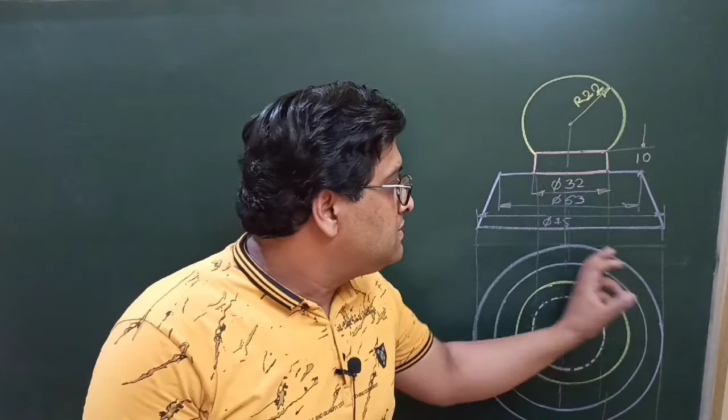Here is a paperweight which is having a spherical knob, a cylindrical part and a frustum of a cone. So in the problem only the front view is provided to you. This top view you need to draw. I have drawn here the top view for your convenience.

So what you have to do, initially you can see, when we see from the top, this 44 mm diameter spherical part is visible like this from the top, right? And this cylindrical part is not visible, so it has been drawn in hidden lines.

The top face of the frustum of the cone is visible, that is with a diameter of 32 mm. 32 mm is the diameter of this cylinder, and this is 63. So this is having the diameter of 63 and the bottommost diameter is given as 75 mm. So we have drawn all the diameters in the top face.

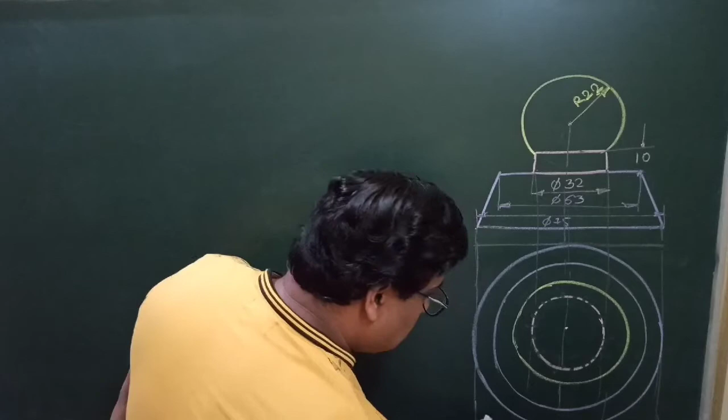Now to start with, initially enclose the lowermost bottom of this front view so as to enclose in a four-sided figure, that is square in this case. So we have enclosed the lowermost bottom 75 mm diameter in a square, and let us start with the drawing.

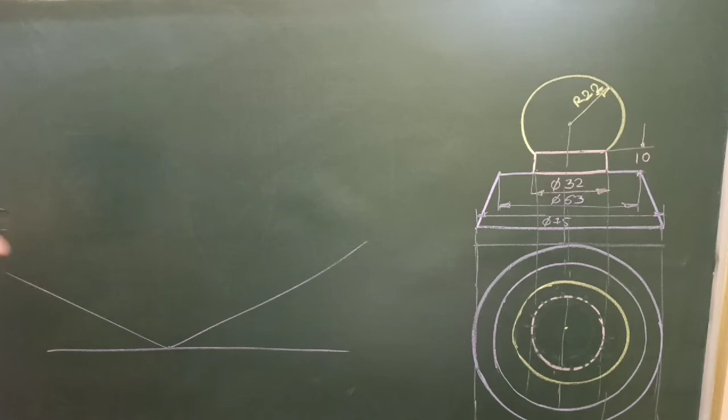So initially draw two lines at an angle of 30 degree here. This point may be this one, so say this is A, B, C and D. So you can cut from A to B, taking these dimensions from there and multiplying it by the scale.

So you have to take this distance multiplied by 0.82 or 0.816. So these two will be the markings, say here, somewhere around here. So this is B, this is D. Now draw the parallel lines so as to get the point C here. So this is the lowermost.

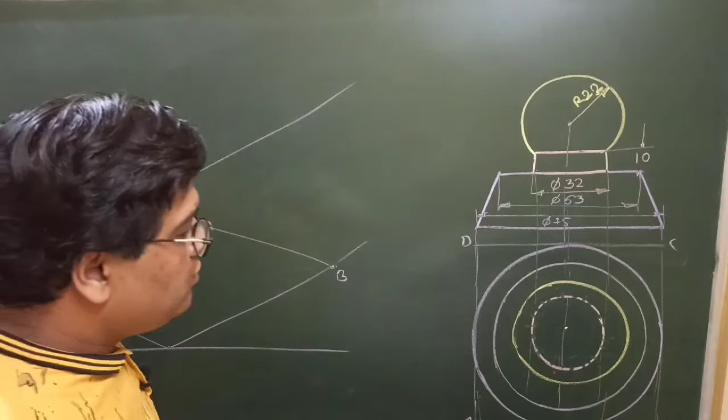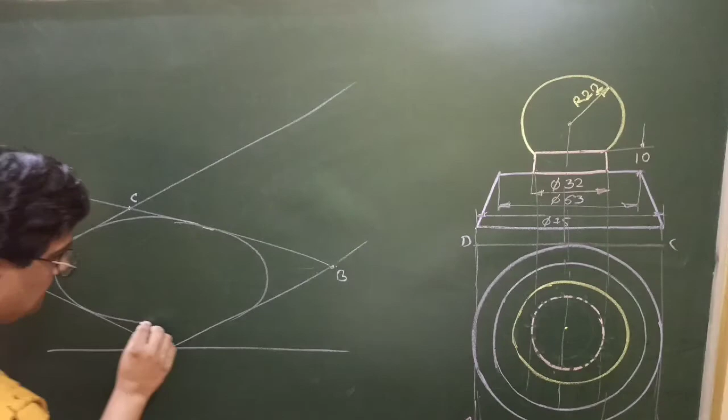Now using four centers method or method of points, you can easily draw the ellipse here like this for the lowermost bottom, that is this one. Now to draw the top face of this conical part, again you have to enclose this circle into a square, and you can mark these corners.

These corners you can easily mark using MN method, as we have already discussed in the previous videos. So this MN method is actually method of points. So you can mark, but before that you have to project the height. So give a height of whatever has been given here. It is, say for example, 25 mm. So this height you have to mark here,

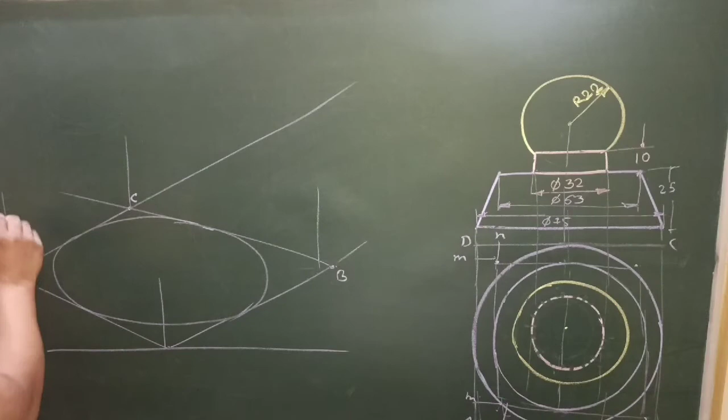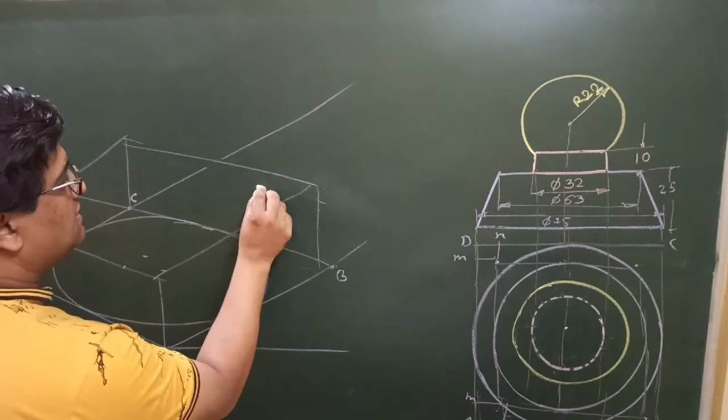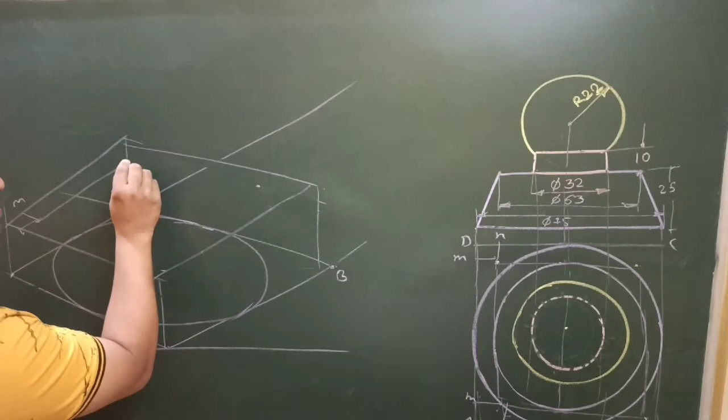so that you are getting another rhombus at the required height. And you can mark using MN method these points. Say these points are here. These are obtained by drawing the parallel lines from M and N. So this is the smaller rhombus for the top face. Now you can easily draw again with the use of either 4 centers method or method of points; this will be the ellipse for the top face of this lower part.

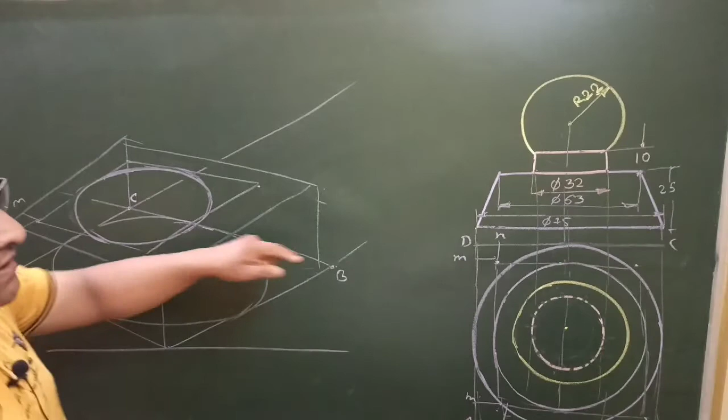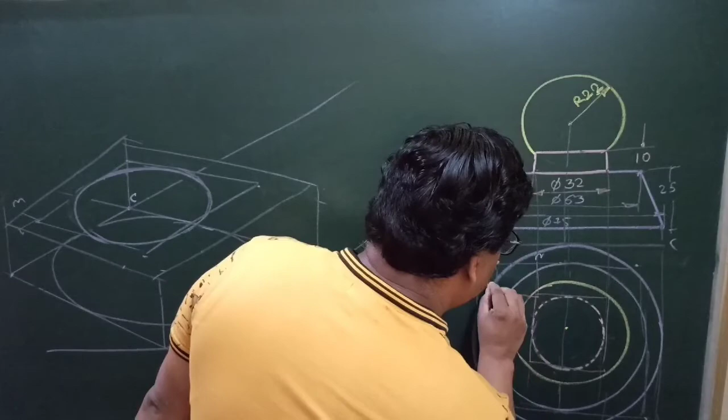Now you have to draw this cylindrical part. For that, again you have to enclose this cylindrical part into a square, and you can easily mark this using MN method with this bigger one. So you can take these points M and N, so that for example you are getting points here, here, here and here.

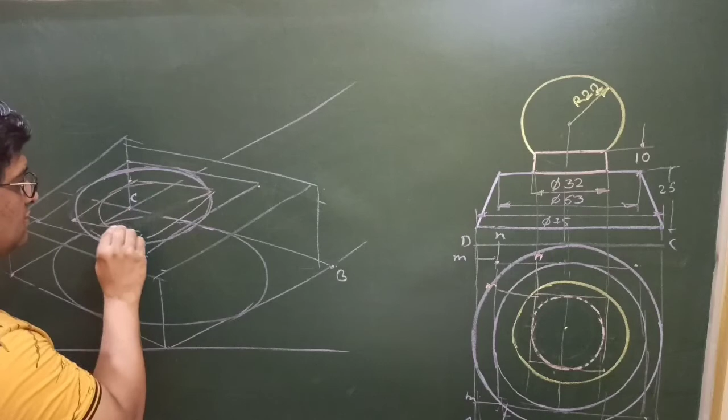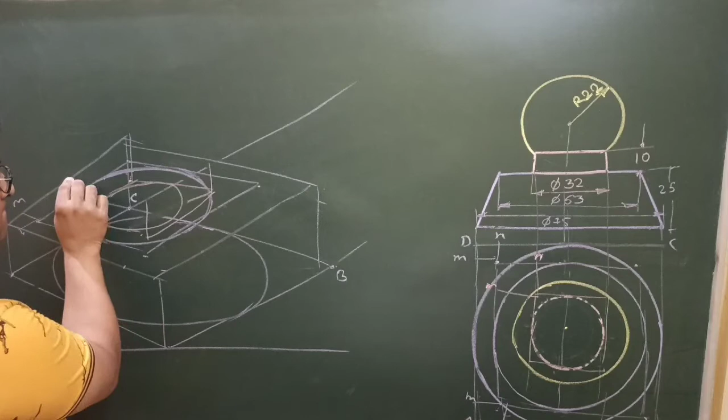So draw another rhombus here and then one ellipse for the cylindrical part. You can project the height of the cylinder here, and another ellipse for the cylindrical part. So two same ellipses will be formed at a height of 10 mm.

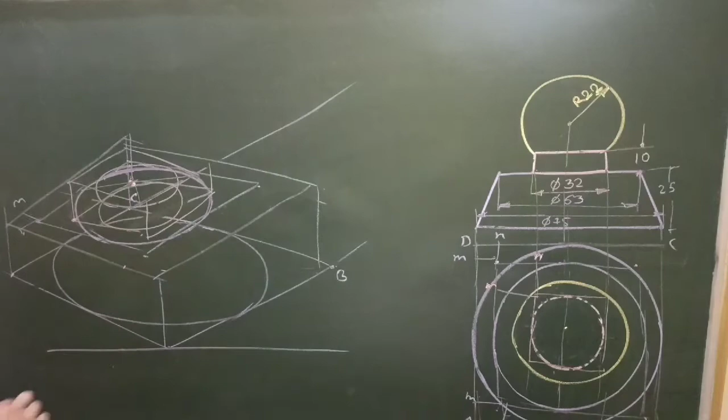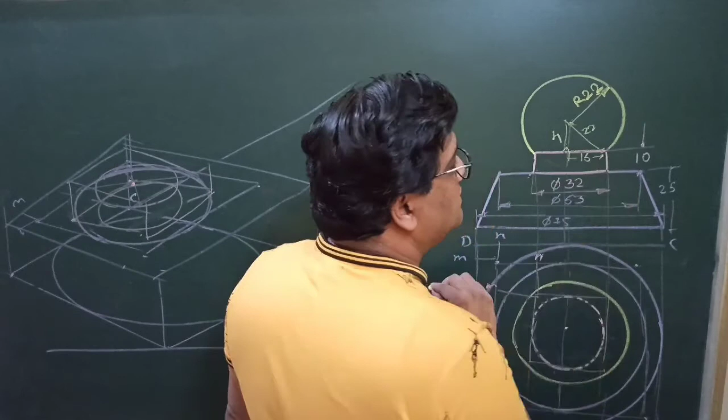Now you have to identify the center. This will be the center, and move up to a height of this one. Now this height is required here. This can be calculated using the Pythagoras theorem, because this is 22 as given here, this is 16 because this complete is 32. So calculate h, which is nearly 15 point something, 15.1 mm. Say this is height of the center.

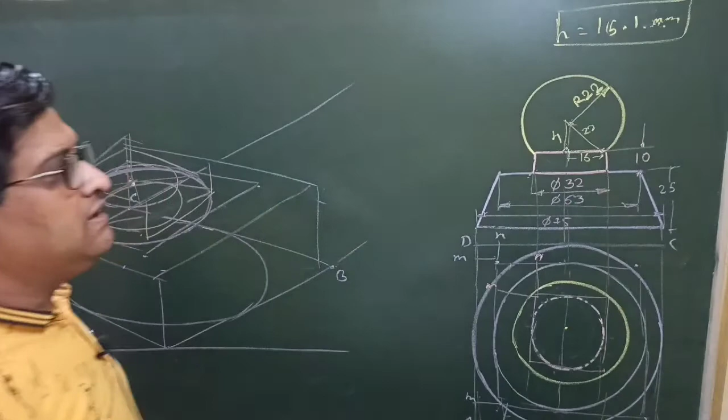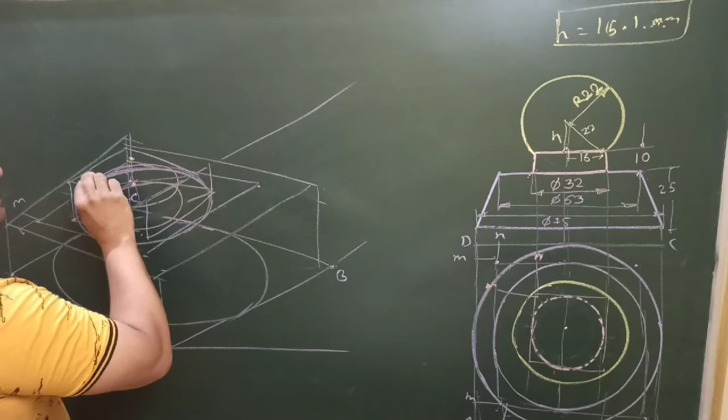So multiply this height by 0.816 and mark the point of center here. Then take the original radius, that is R22, and draw a circle here, which will be joining this cylindrical part at some point. Now you can highlight; so this will be the cylindrical part.

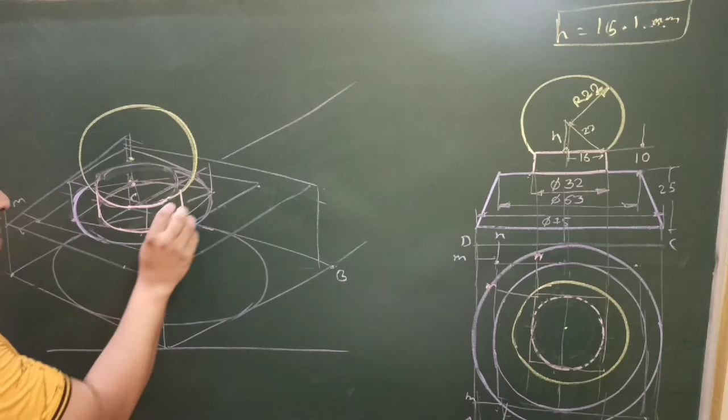You need not show this, only light you can keep it, and this yellow one is the spherical part. Now you can highlight the cylindrical portions, so they are somewhere around here, and this is the lower part which is to be darkened. As far as the lower part is concerned, only the front part is to be darkened, and join them with tangential lines like this.

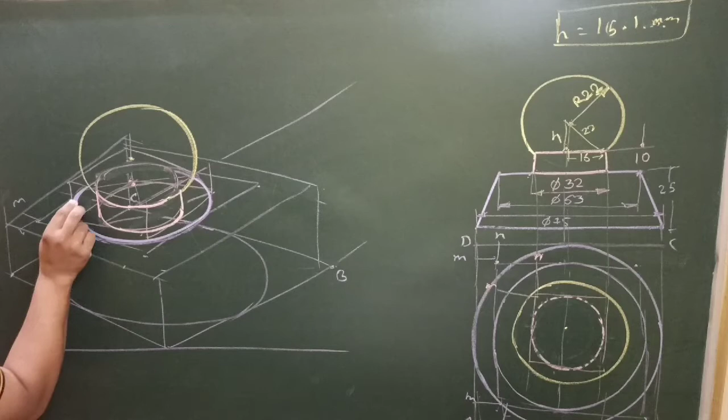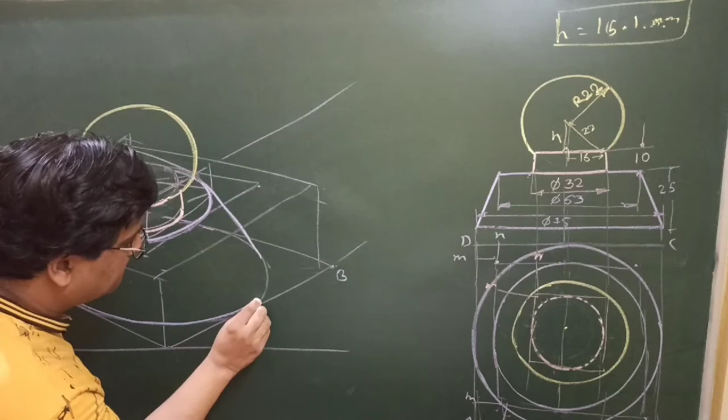So now you can darken them, this line and this line, and then this part. Like this. So this completes the isometric projection of this paperweight.

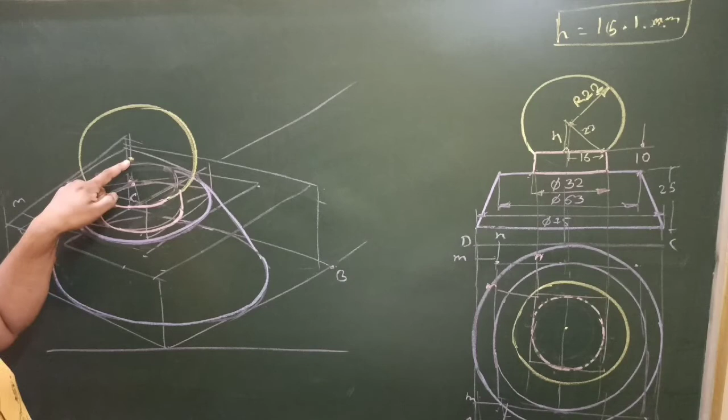Similar type of questions can be attempted using the methodology, but remembering that whenever there are spherical parts, you have to take isometric scale into consideration till the point you are going to draw the circle for the sphere. Means up to the point when you have identified the center in the diagram, you have to take scale,

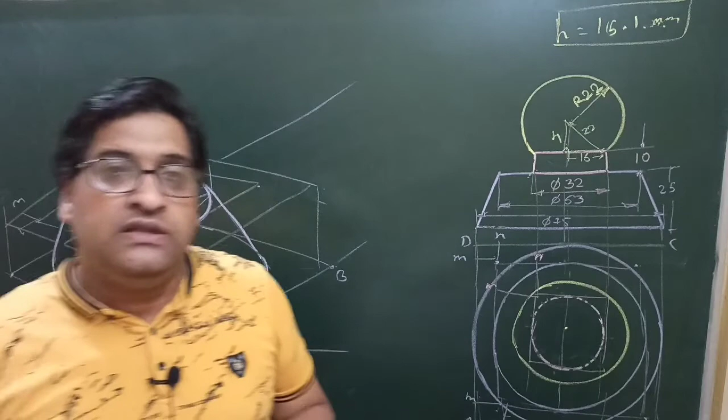and while drawing the sphere you need not take the scale, you have to take the original radius of the sphere, because the sphere has its original diameter or radius irrespective of where you are looking from. So it is always a circle of the original radius.